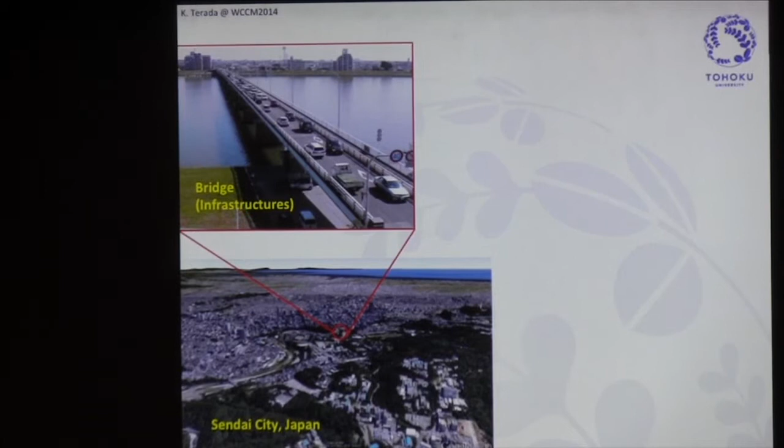Okay, let's start with this slide here. This is my hometown Sendai. Sendai is often subject to earthquakes here. Then this is the bridge, the typical infrastructure here. On this bridge, there are many cars, and these cars are composed of several metals.

By applying the multi-scale computation, We can replace some of these metals with magnesium as a structure member. Then look at this coastal area - we also can apply multi-scale computation to assess the stability of this kind of rock mass. On this rock mass, we may have this kind of nuclear reactor building.

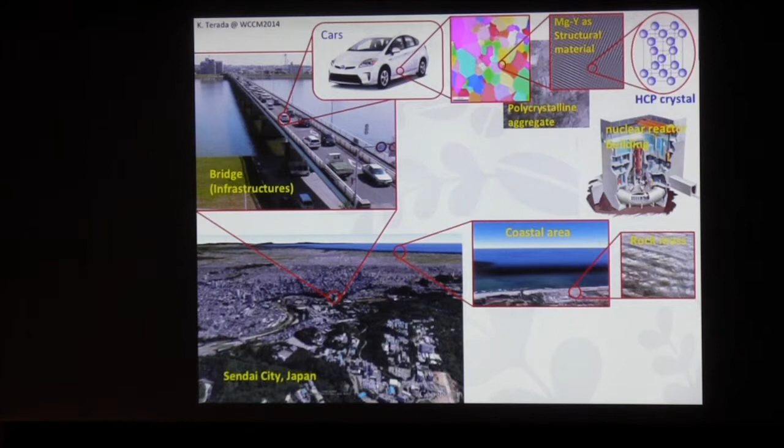In this building, we also have material that suffers from fracture due to aging and chemical reaction. This kind of phenomena, we can also apply multi-scale computation to evaluate the macroscopic behavior. At the same time, we have tsunamis on the coast - the damage by tsunami can also be predicted by multi-scale computation.

So with this overview, we have three topics today in this presentation. One is the method of two-scale analysis for nonlinear solids and plates, with emphasis on the decoupled two-scale analysis for nonlinear solids. The other two topics are applications of the idea of numerical material testing for material science and also disaster science. In this context, we extensively utilize the nonlinear homogenization method.

So I'd like to give you a brief historical development of the nonlinear homogenization method in this context. Let us begin with this first topic.

As you know, the theory of the homogenization method was originally developed in the 1970s and early 80s, mainly in France, Italy, the former Soviet Union, and the United States. These are the famous mathematicians in this field. As you may know, Babuska was the godparent of the homogenization method.

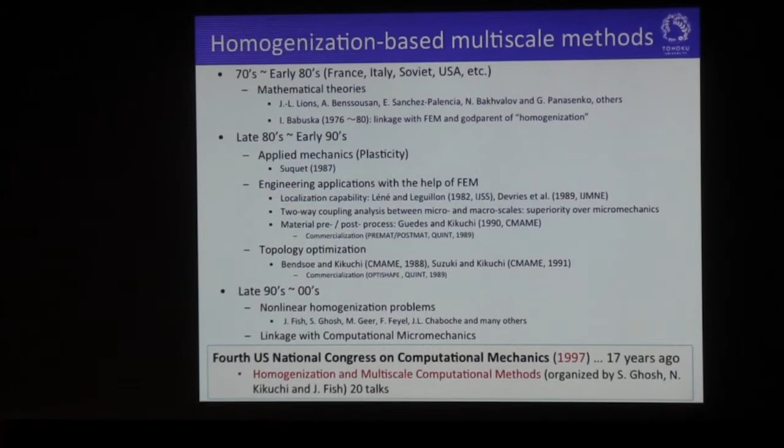According to my survey, it is in this meeting that the term multi-scale was first used in the field of computational mechanics. After that, the popularity of multi-scale became clear. It may be wrong, but according to my survey.

Then, for nonlinear homogenization problems, there are several branches. The work done by Suquet was highly important in this field, especially for inelastic problems. This work was followed by many researchers.

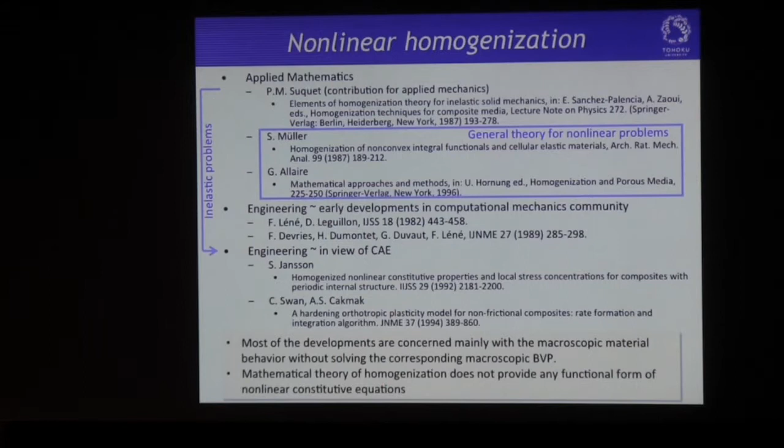However, most of the development is concerned mainly with the macroscopic material behavior without solving the corresponding macroscopic boundary value problem. This is probably due to the fact that the mathematical theory of the homogenization method does not provide any functional form of nonlinear constitutive equations. So many researchers have tried to develop micro-macro coupled FE analysis.

This is also known as FE square, nested FEM, and multi-level finite element method. Here is a list of early developments in this context. This slide shows a typical example of the coupled method.

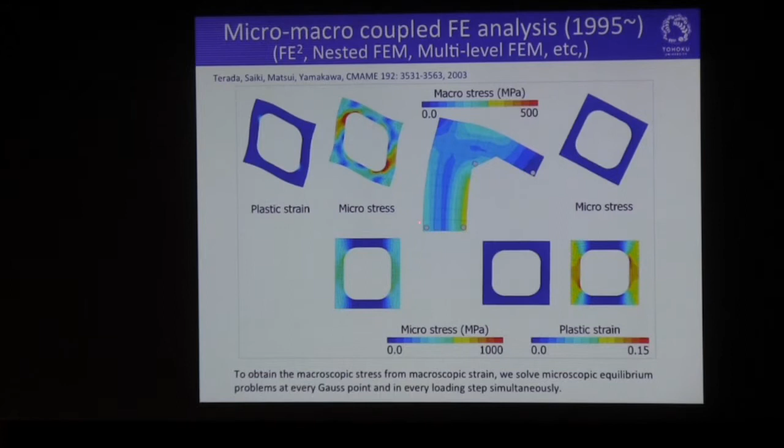Here is my macrostructure. We solve this macrostructure equilibrium problem without any macroscopic constitutive equation. Instead, in order to obtain the macroscopic stress in this field from the macroscopic strain, we solve the microscopic equilibrium problems at every Gauss point and in every loading step simultaneously.

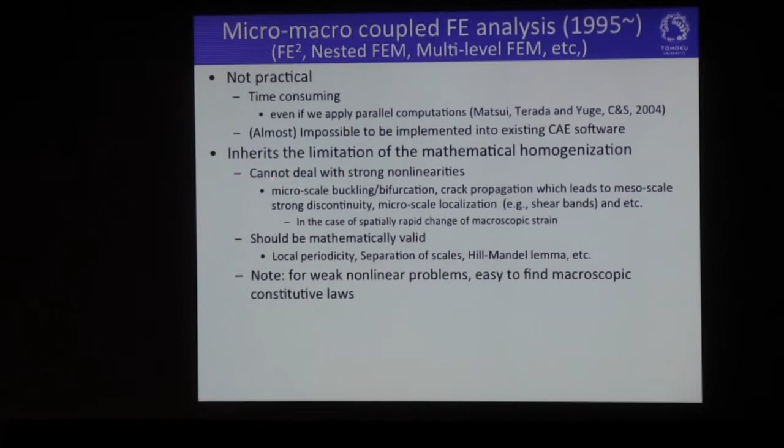As you can imagine, and as some of you already experienced, this method is very time-consuming even with parallel computations. It's also almost impossible to implement into existing CAE software. More importantly, this method inherits the limitations of the mathematical homogenization method, meaning we cannot deal with strong nonlinearity, including microscale buckling and similar phenomena.

We note that for weakly nonlinear problems, it's very easy to find macroscopic constitutive laws. So my assertion is that homogenization-based two-scale analysis methods are readily applicable when the macroscopic constitutive equation can be found or constructed with reference to the constitutive laws assumed at the microscale.

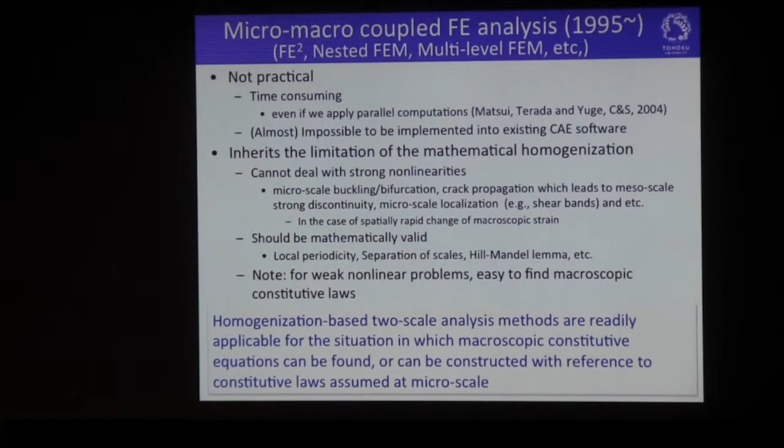This is why I gave up this coupled method 10 years ago, although I was the one who originated the coupled method. But now I recommend the decoupled two-scale analysis method that is studied and validated in these references.

Let me show you a very simple numerical example using this kind of unit cell, which is composed of carbon fiber and polycarbonate matrix.

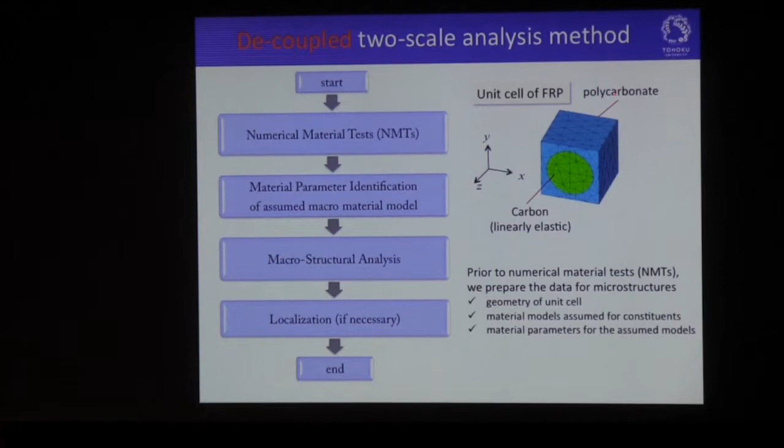Before conducting the numerical material test based on the homogenization method, we prepare the data for the microstructure: the geometry of the unit cell, the material model assumed for the constituents, and the material parameters for the assumed model. We assume the carbon fiber is linearly elastic, but the polycarbonate should exhibit some sort of nonlinearity.

This slide shows the stress-strain curve of the polycarbonate matrix, which shows weak nonlinearity. As you can see, rate-dependent plastic deformation can be found. At the same time, we can see stiffness reduction in the unloading process.

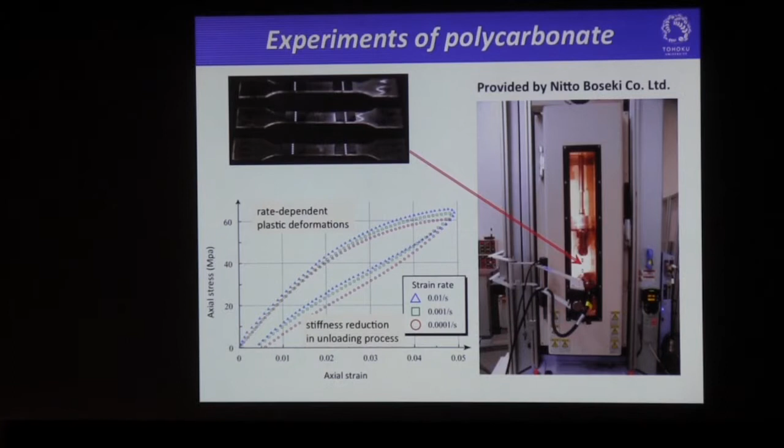In order to represent this kind of material behavior, we introduce this constitutive equation, an elastoplastic creep damage model that exhibits weak nonlinearity. This equation is very standard, so we don't need to explain the details, but here are the unknown parameters for the material.

So we have to identify those material parameters before conducting numerical material tests. After identifying the material parameters of polycarbonate with reference to the experimental data, we can conduct numerical material tests on this unit cell.

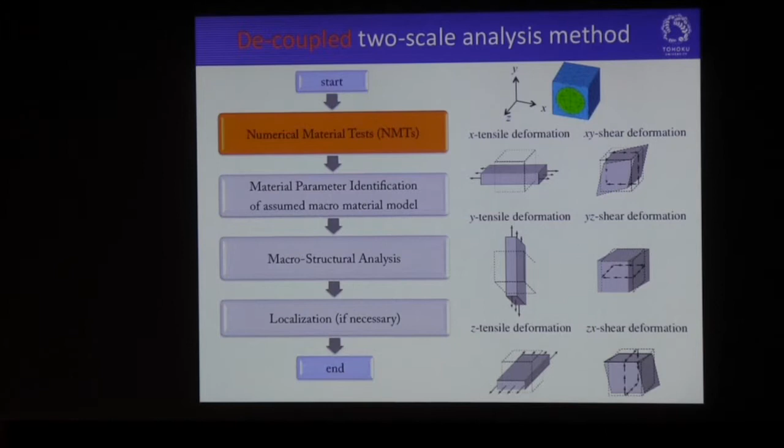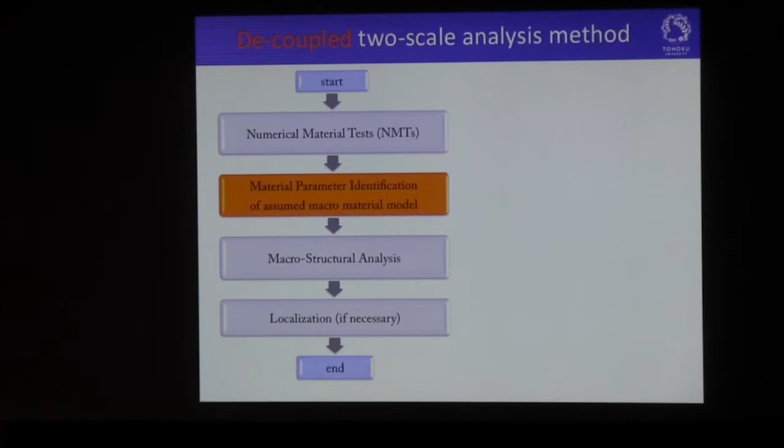Let us move on to the next step. We have to identify, or assume, the macroscopic constitutive equation to represent such macroscopic response. For that purpose, I put forward the ansatz that the macroscopic constitutive law inherits the characteristics of the microscopic one. This is validated in this article.

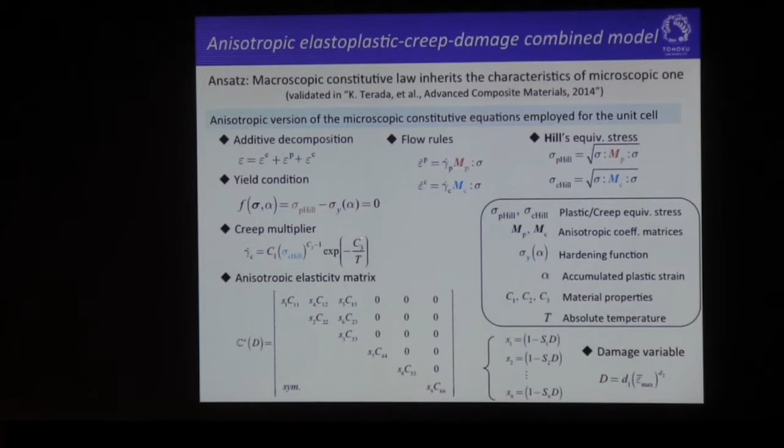Then I employ the anisotropic version of the microscopic constitutive equations used for the unit cell, that is, the anisotropic elastoplastic creep damage model. These equations are almost the same as those assumed at the microscale, except for the anisotropy, which can be represented by the Hill's parameters in creep and plastic strain.

By using different Hill parameters for the plastic and creep flow rules, we can characterize the anisotropic inelastic deformation in this material. These are the material parameters to be identified in this model, which has 39 parameters.

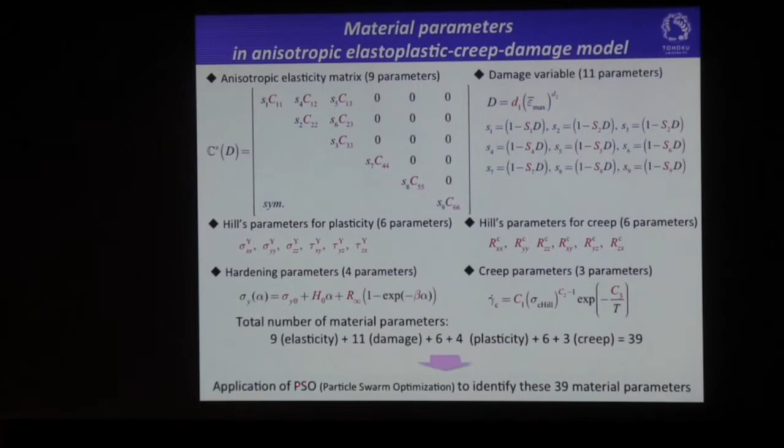So we have to apply some sort of optimization method to identify these parameters. In this study, I applied particle swarm optimization, which is one of the population-based descent methods. We applied this method to identify these 39 parameters.

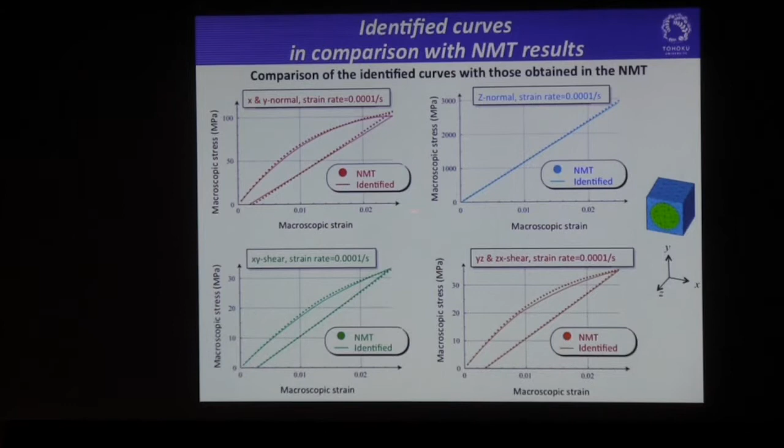We could obtain these identified curves in comparison with the numerical material results. As you can see, the identification is quite successful.

So we can move on to the macroscale analysis. By using the assumed macroscopic constitutive equation and the identified material parameters, we can conduct the macroscopic stress analysis.

Here is my macroscopic structure, which is a typical specimen of fiber reinforced composite. To demonstrate anisotropy, the fibers are oriented in this direction. These are the analysis conditions, but the details are not important in this context of the demonstration.

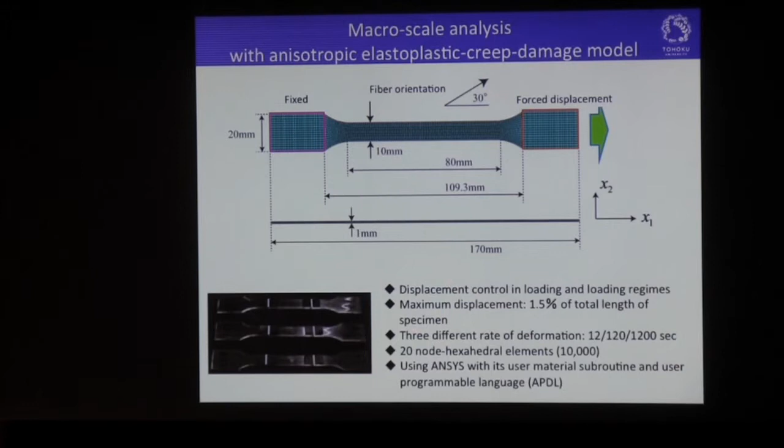Here shows the macroscopic analysis result, the overall response. Through this loading and unloading process, we obtain this kind of macroscopic deformation together with the stress distribution, which shows anisotropy reflecting the fiber orientation here.

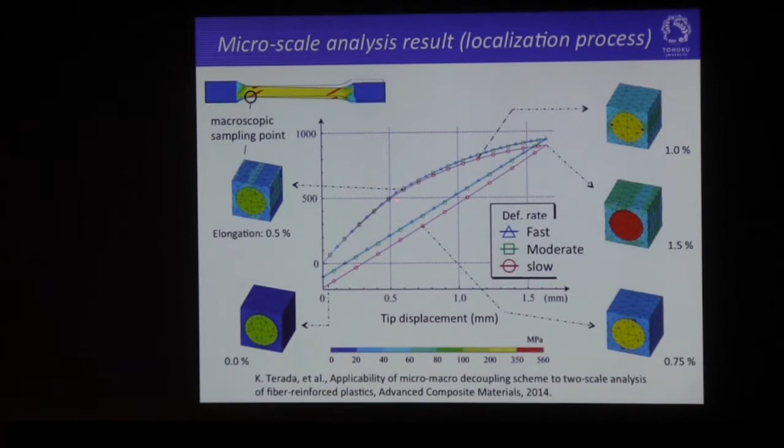So we can move on to the next step, that is localization analysis. We pick up the macroscopic sampling point, extract the macroscopic strain history, then impose that strain history onto the microstructure to get the microscopic mechanical behavior of the unit cell during this macroscopic deformation. We expect this decoupled analysis to have the same accuracy as the coupled analysis, but it is much cheaper compared with the coupled analysis.

Let us move on to the next topic. Because of the feature of the decoupled method, implementation of this method into existing finite element software is very easy. Let me show you the commercialization here.

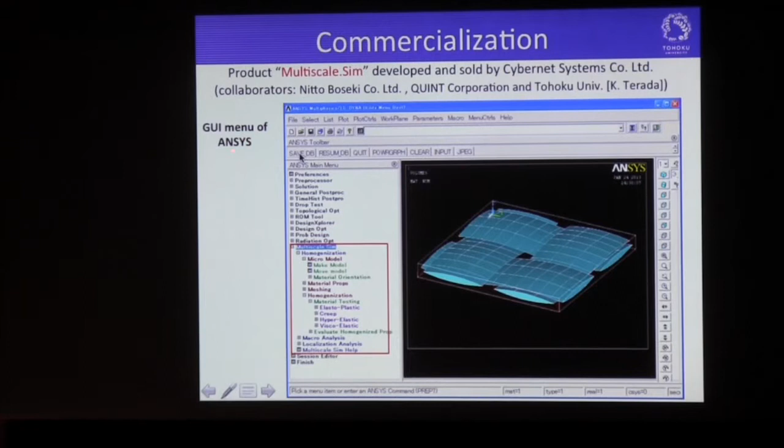This shows the GUI menu of ANSYS, which enables us to perform the multiscale analysis using this GUI. This product is called Multiscale.Sim, developed and sold by Cybernet Systems. These are the collaborators of this development.

Here shows some functions installed in this software. You can see the homogenization part, which involves numerical material testing for weak nonlinear materials. This function also has macro scale analysis, and we can conduct localization analysis within this software.

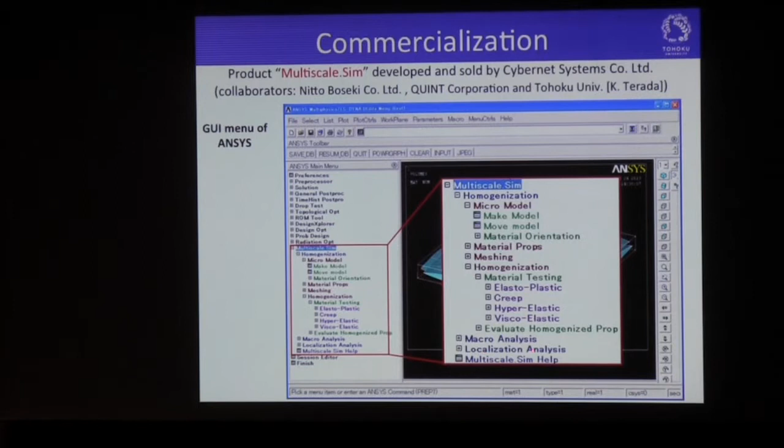Since the micro and macroscopic analysis are standard finite element analysis, we can utilize all the material models inside this software, as well as the existing pre- and post-processing functions. This makes it very easy to analyze.

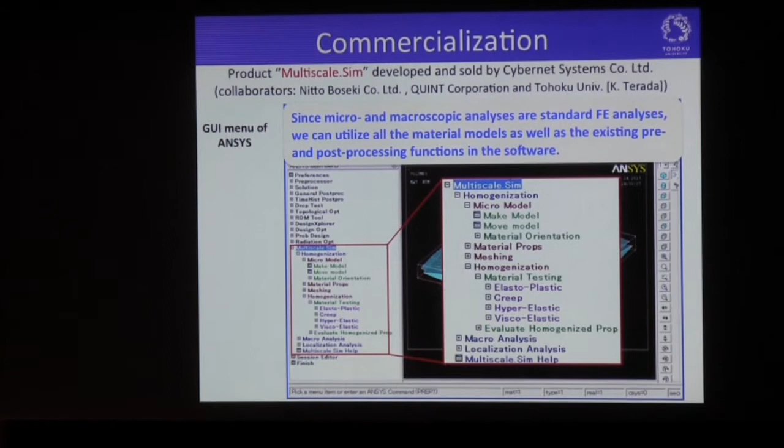Let me show you a simple numerical example using this software: decoupled two-scale analysis of a three-point bending test. As you can see, this is the localization analysis result during this macroscopic deformation.

As you can see, the fibers are damaged in the tensile region of this macrostructure, and the matrix is damaged in the compressive region of the macrostructure.

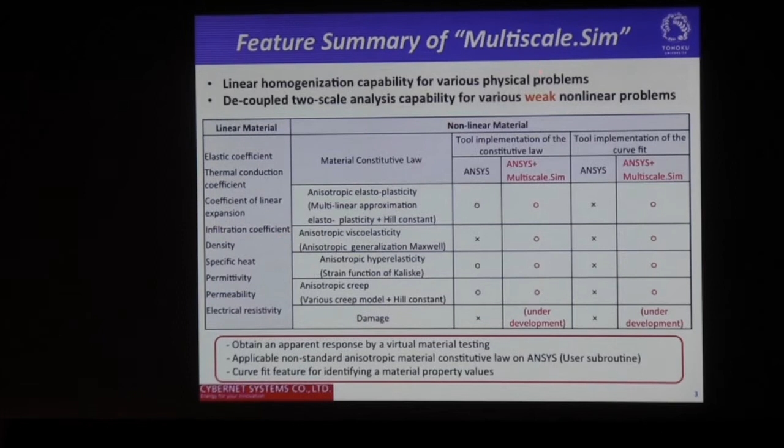This table summarizes the features of Multiscale Sim. This product provides linear homogenization capability for various physical problems, as you can see here. Also, look at this table - this product provides decoupled two-scale analysis capability for various weak nonlinear problems.

Let us move on to the next topic: decoupled two-scale analysis for nonlinear plates. Because time is limited, I just put the result. This is the example of a composite plate with in-plane periodicity.

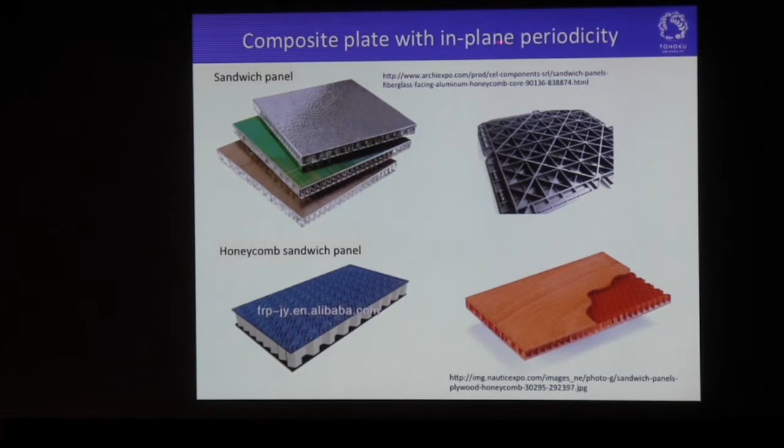Here's my example: a two-scale decoupled plate analysis for a floor slab with asphalt mixture. Here is the macrostructure, this is the microstructure. This microstructure is just a unit cell model with in-plane periodicity, modeled by 3D solid elements. On the other hand, this macroscopic plate model is generated by laminated plate elements.

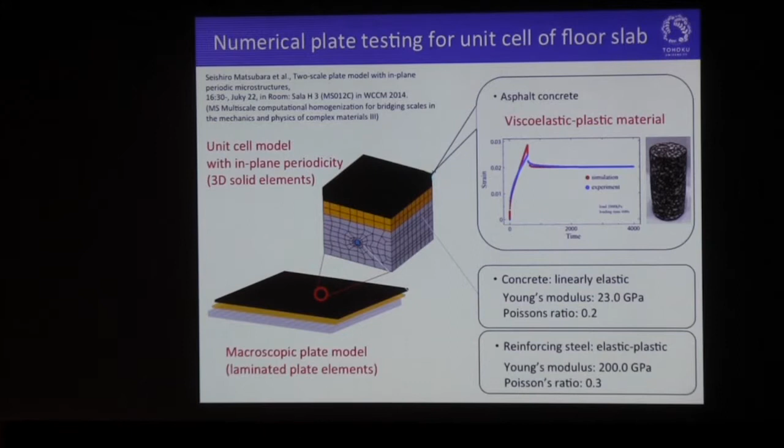Here we assume this kind of material behavior for the asphalt concrete - we assume the viscoelastic plastic type, and the concrete is linearly elastic. Then we apply the method of numerical plate testing in order to obtain the macroscopic plate stiffness.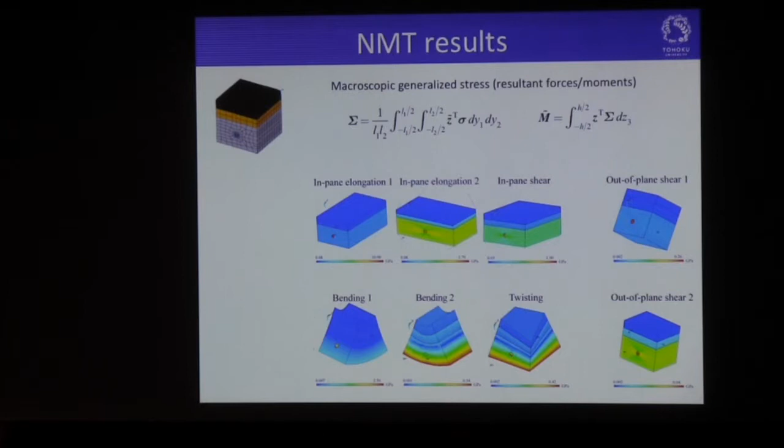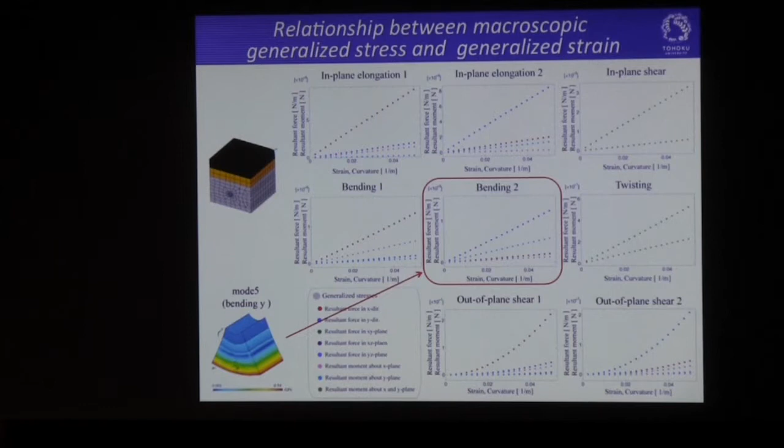Then we could have this kind of relationship between the macroscopic generalized stress and generalized strain. We identified some material parameters for each layer.

Then we could make the macroscopic analysis set up as in this figure. This is the bridge, the floor slab of the bridge, modeled by a plate laminated shell element here. Then we can have this kind of micro and macro response of the floor slab.

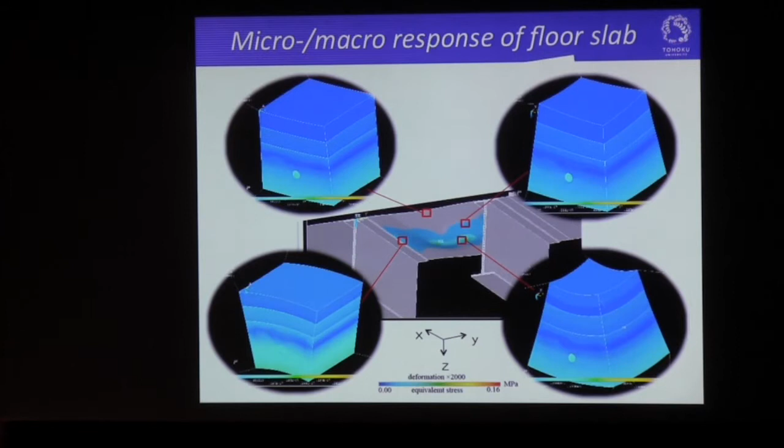This is the example of decoupled analysis of a composite plate.

So let us move on to the next topic, that is numerical material testing in material science. We have two topics today. One of them is the characterization of the macroscopic ductility and toughness of magnesium yttrium alloy. This is joint research to utilize magnesium alloy as a structural material in lightweight cars.

Here is a typical stress strain curve for pure magnesium, and also the curve for the magnesium alloy. Pure magnesium shows poor ductility and toughness because this material suffers from cracks in the microstructure like this. On the other hand, this magnesium alloy shows good ductility and toughness. It is clear the effect of yttrium is the enhancement of ductility and toughness.

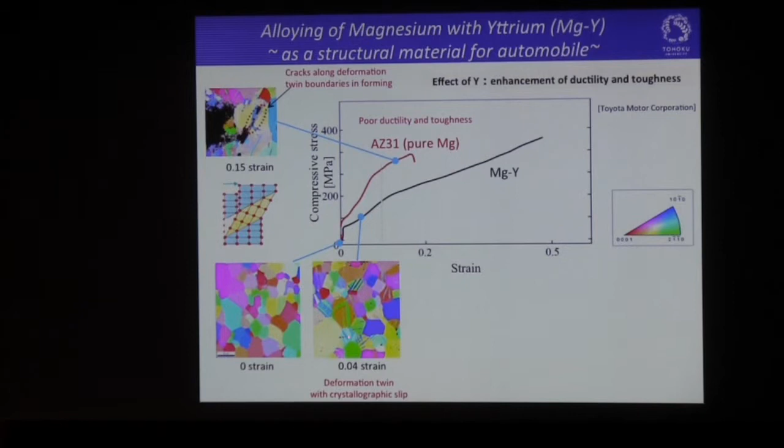Then look at this microstructure - this is the polycrystalline aggregate of the magnesium alloy. Then we apply compressive loading to this microstructure. We have this kind of deformation twinning here with crystallographic slip.

After the final stage of deformation, we could have dynamic recrystallization, which involves grain refinement. These two deformation mechanisms, deformation twinning and dynamic recrystallization, probably make the material more ductile and tough.

I'd like to simulate this complex microscale deformation in order to characterize the corresponding macroscopic material behavior. So in order to do that, I will introduce the deformation gradient.

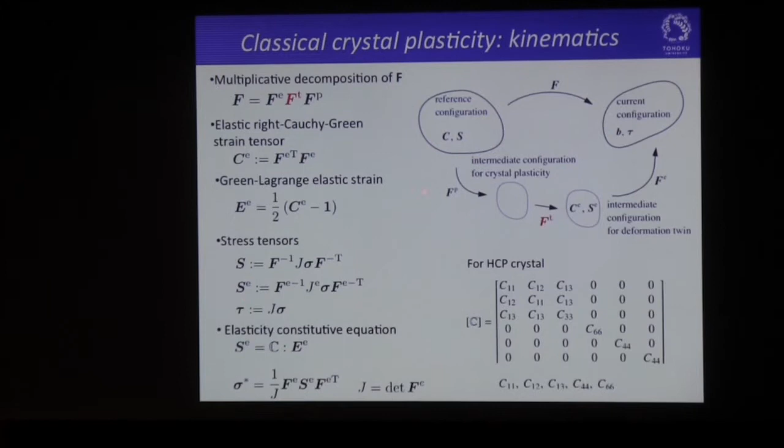This is the twinning deformation gradient between the elastic and plastic components of the deformation gradient. All the other equations are the same as the classical theory of crystal plasticity, so I will skip most of the equations associated with the crystallographic slip.

But here is the standard expression of the resolved shear stress, and here is the Schmid tensor. This is the famous typical expression for the flow rule using the Schmid factor, and also the hardening law and the slip rate here.

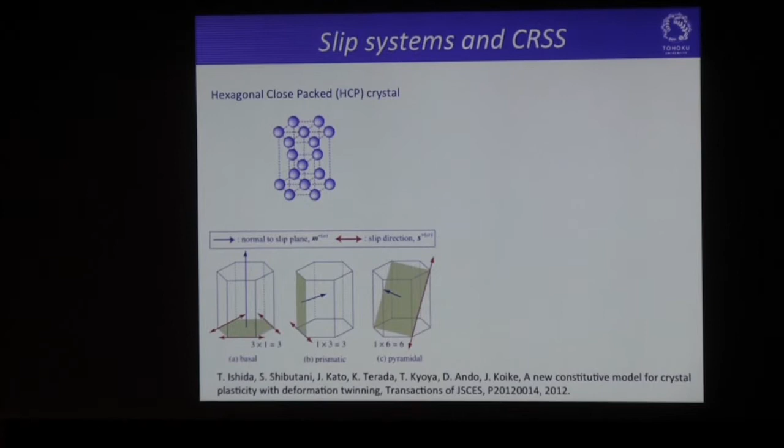But we have to be careful about the characteristics of the slip system and critical resolved shear stress of this material - these are the slip surfaces of the hexagonal close-packed crystal of magnesium. The very important feature of this material is that the critical resolved shear stress of the basal slip is extremely low compared with other slip systems.

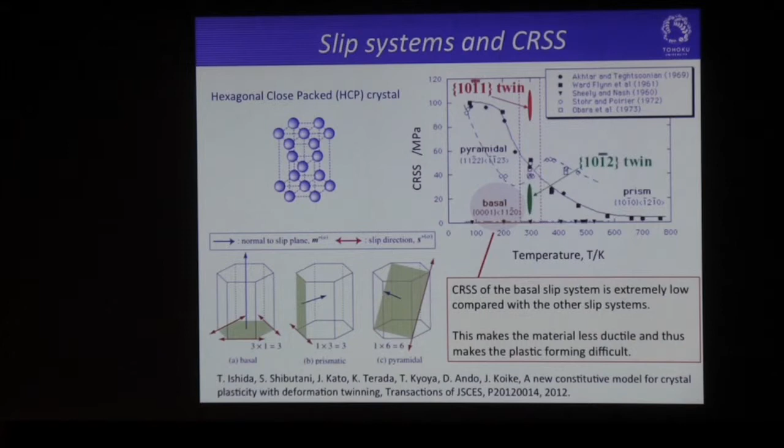This feature makes the material less ductile and thus makes plastic forming very difficult. So in order to be more ductile, magnesium should have other deformation mechanisms. One of them must be deformation twinning, like this.

I have already introduced the twinning deformation gradient. So we assume the twinning deformation gradient of this form. Here is the twin configuration tensor that can be determined geometrically, and some of them are depicted in this figure.

And we take the standard process within the framework of thermodynamics to derive this kind of evolution equation, the flow rule of the internal variable. This is the corresponding driving force of deformation twinning.

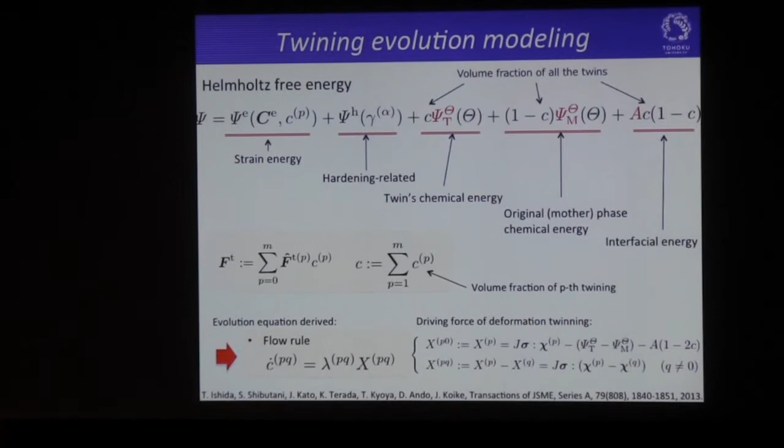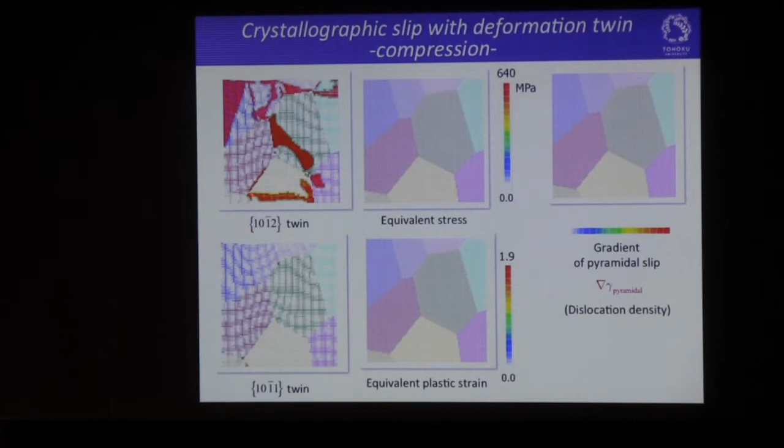Here shows a numerical example under compression. This is the typical distribution of the deformation twinning. As you can see, 10-12 twinning is more likely to be active compared with this deformation twinning.

During this deformation, we could have this kind of microscopic stress distribution together with the plastic deformation. As you can see, in the region of the twinning deformation, we could have this kind of small value of plastic strain.

At the same time, we could also have the distribution of the gradient of pyramidal slip, which we employed as a driving force of the dynamic recrystallization. This is just the dislocation density, and this is the distribution of the gradient of pyramidal slip.

Using this information, we could perform the dynamic recrystallization by using the multi-phase field method, like this.

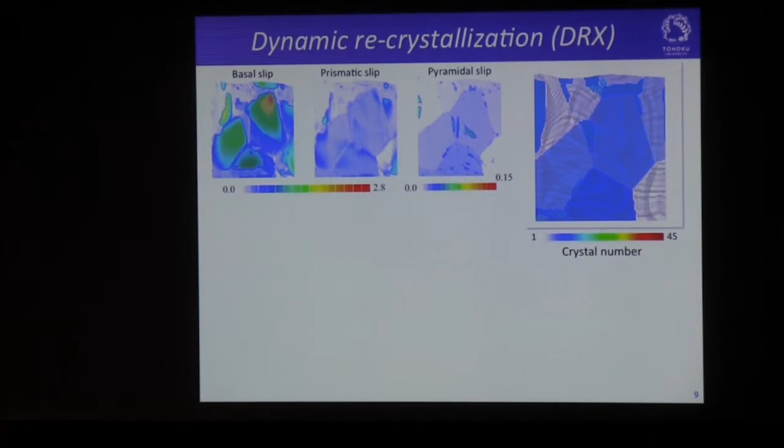We performed a coupling simulation of the crystal plasticity finite element method and the multi-phase field method in order to evaluate the nucleation and grain growth, like this. At the same time, we could have this type of macroscopic stress-strain curve.

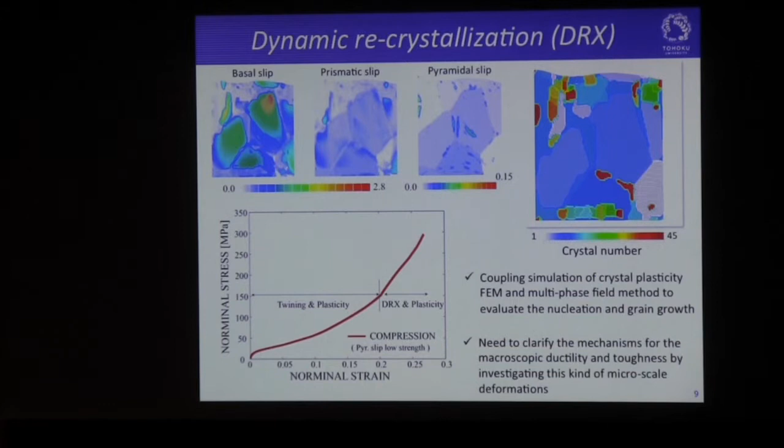So now on, we have to clarify the mechanism for the macroscopic ductility and toughness by investigating this kind of microscale deformation and the macroscopic response. But unfortunately, we haven't done that yet - this is ongoing research, so I don't have any result further. Let us move on to the next topic.

The next topic will be the assessment of the macroscopic strength and durability of polycrystalline metals, which involves microscale cohesive cracking due to hydrogen embrittlement.

Hydrogen is a very important element in energy engineering. When hydrogen diffuses along the grain boundary in a polycrystalline aggregate, the material suffers strength degradation, which may be caused by an electrochemical reaction. This strength degradation is called hydrogen embrittlement.

This eventually causes segregation of the grain boundaries, and as a result, the macroscale strength also decreases with cracking. Unfortunately, the interaction between the micro and macroscopic fracture process has not been fully understood yet. So I'd like to characterize the macroscopic strength and durability by analyzing microscale cracking in a polycrystalline aggregate subjected to hydrogen-induced degradation.

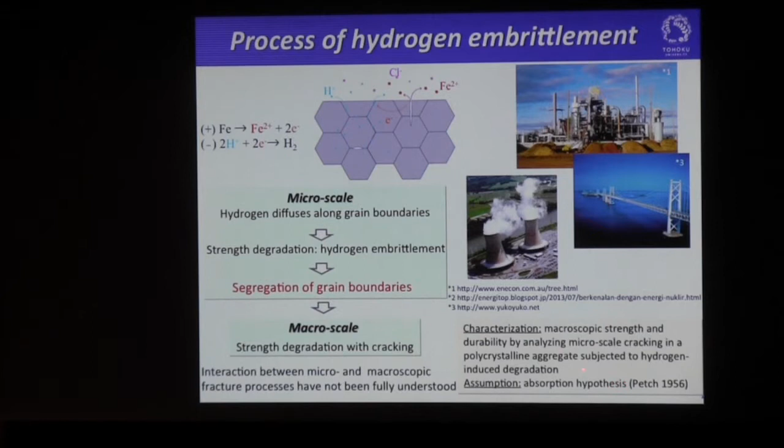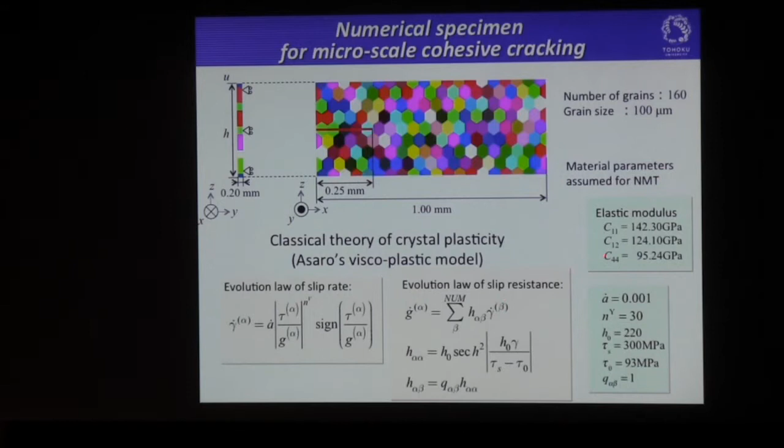In order to represent the plastic deformation of this material, we employ the classical theory of crystal plasticity, with this evolution law of slip rate and slip resistance. These are the material parameters I assumed for the numerical material testing here.

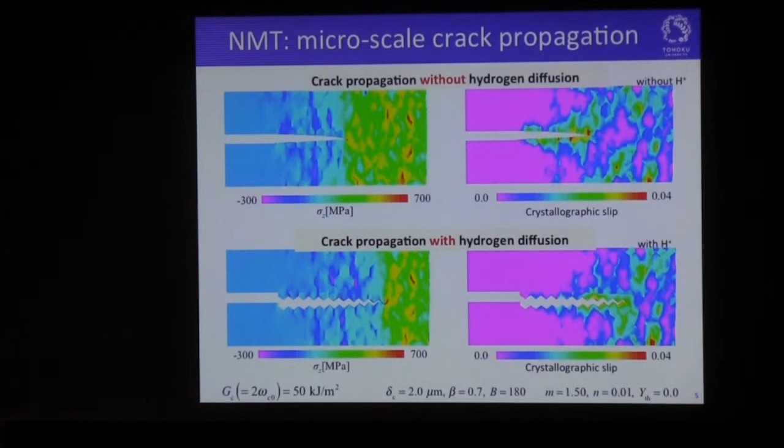So, next topic: we move on to the numerical material test for disaster science. This is the material to disaster — the scale is totally different.

We have three topics today. One of them is the two-scale stability analysis for the seabed, or rock mass, with coastal levee.

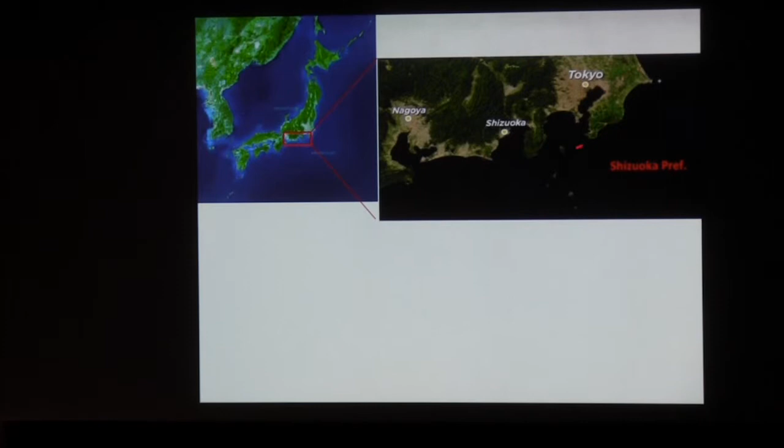Here shows the Japanese islands, and here we have Shizuoka prefecture. We may have this kind of nuclear power plant subject to earthquake and tsunami here. But today I'm not interested in this facility, but in the seabed close to this plant, on which the coastal levee and intake towers are laid.

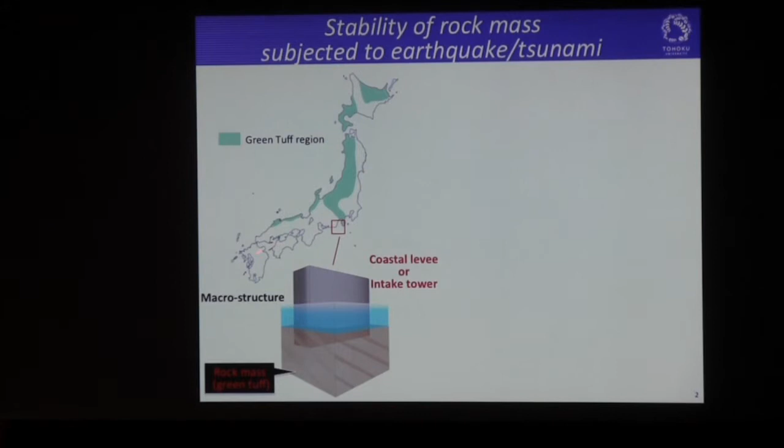Here, the rock mass is composed of green tuff. This shows the green tuff region around these islands. This coast is covered by this kind of alternately layered rock mass, which has this kind of microstructure composed of mudstone and sandstone, although this has a different dimension here.

So the mission is to assess the stability of the seabed, that is the rock mass supporting the coastal levee or intake tower subjected to tsunami. For that purpose, we have to conduct a numerical material test to characterize the macroscopic strength by considering the anisotropy in deformability and strength, and also the dependency on consolidation stress. At the same time, we consider the elastoplastic behavior in compression and the quasi-brittle failure in tension.

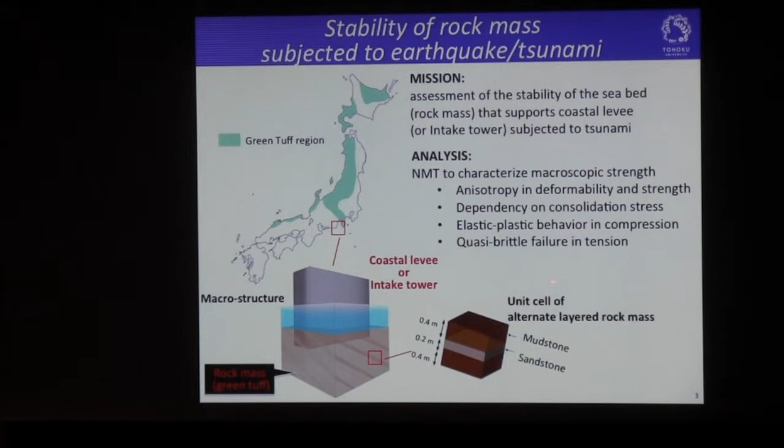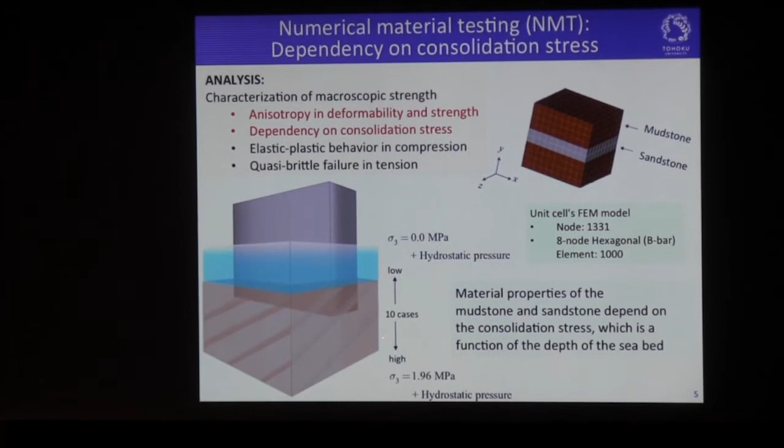Then, as I mentioned, we have to consider the anisotropy in deformability and strength, and also the dependency on consolidation stress, that is, the material property depending on consolidation stress which is a function of the depth of the seabed. This is the intake tower, this is the seabed.

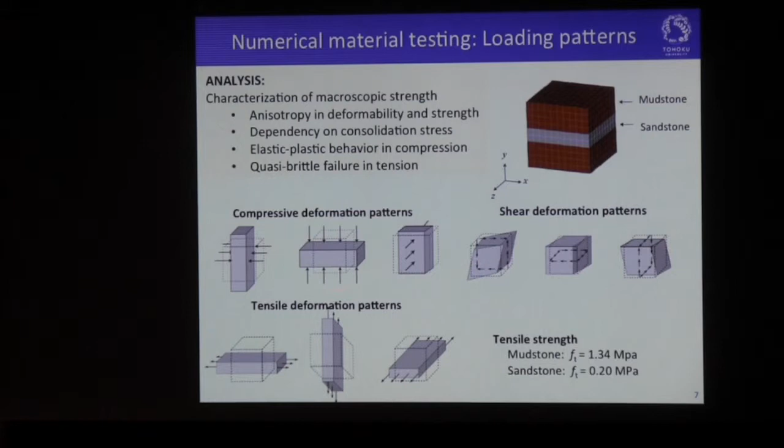With this material information, we can perform numerical material testing for this kind of microstructure composed of mudstone and sandstone, imposing macroscopic deformation into this unit cell to obtain the numerical material test result.

In order to represent such anisotropic response, we employ Hill's model for anisotropic plasticity. This is the standard orthotropic elastic tensor for the generalized Hooke's law, and this is the standard expression for the yield function using Hill's equivalent stress. We don't need to explain the detail, but here we have the material parameters to be identified.

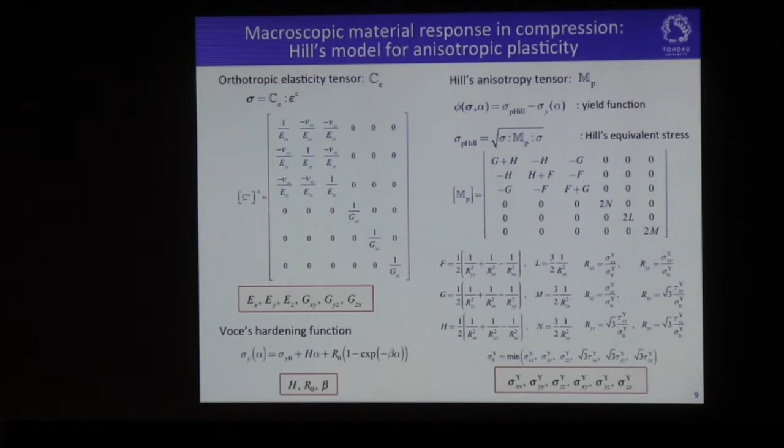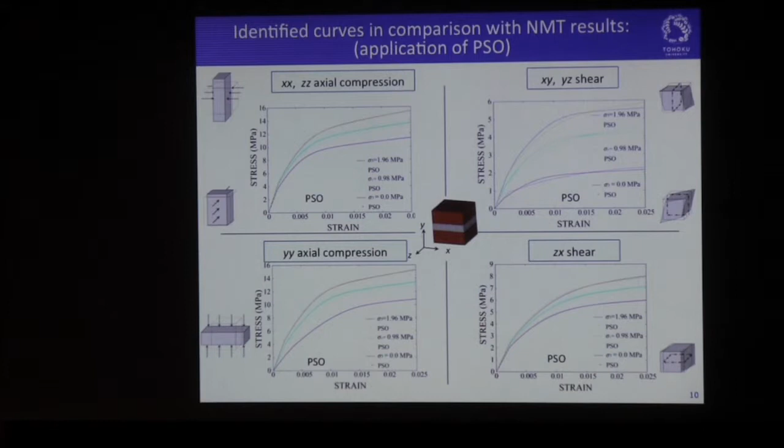Now this is the macroscopic material response in tension as a result of the numerical material testing on the unit cell, which exhibits quasi-brittle failure in tension. Depending on the macroscopic loading patterns, we have an anisotropic characteristic in the macroscopic tensile strength, like this.

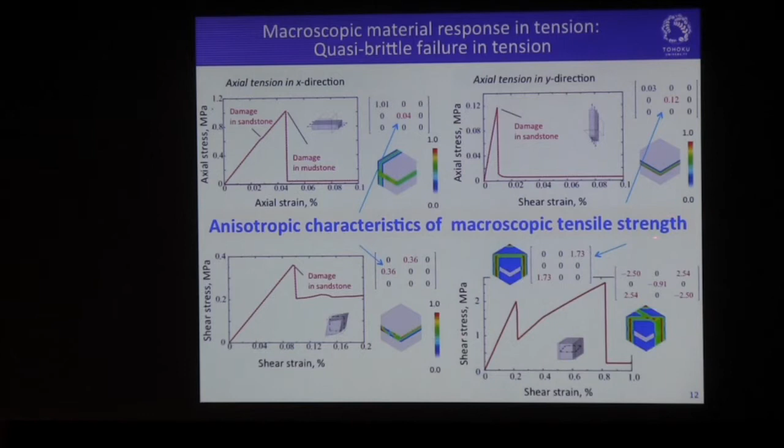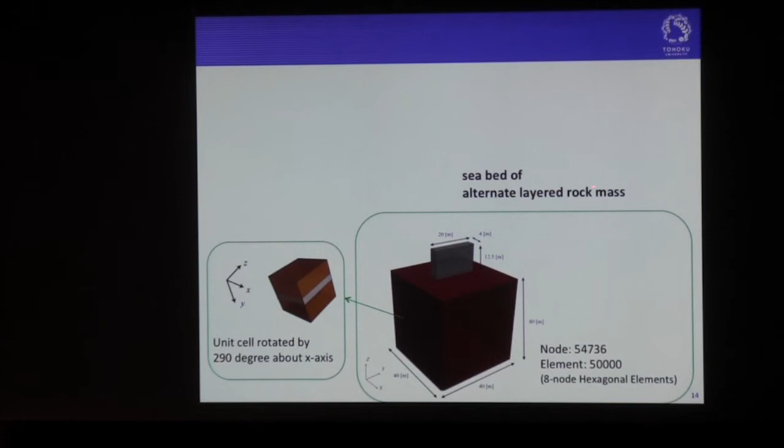Now let's conduct the macroscopic analysis of the seabed of alternate layered rock mass composed of this unit cell. The external loading on this seabed comes from the coastal levee, which is attacked by the fluid force generated by tsunami. For the tsunami simulation, we set up this domain.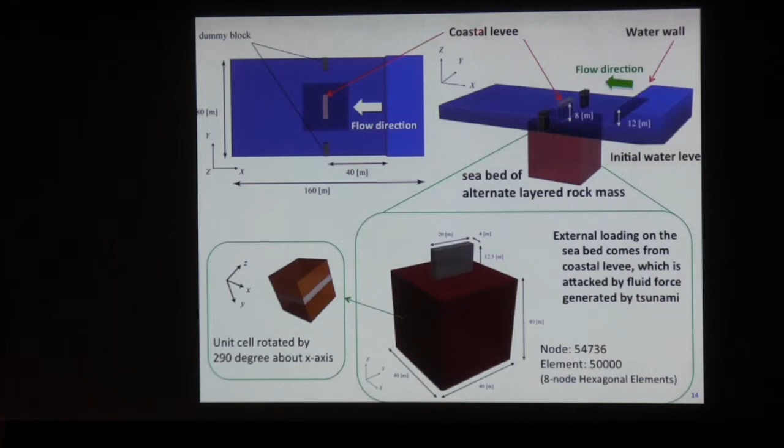Here is the water wall, with the initial water level here. This is the flow direction, and this is the coastal levee. We put here dummy blocks. Then this is the analysis result.

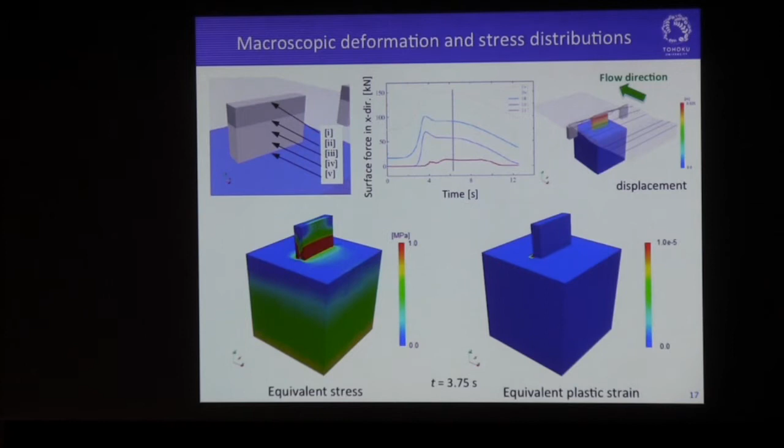Then we can assess the macroscopic stability of the seabed by using the envelope of macroscopic strength. Here is the envelope. We pick up four points of the macroscopic material point. Then we can recognize this point B is a possible failure position in tension.

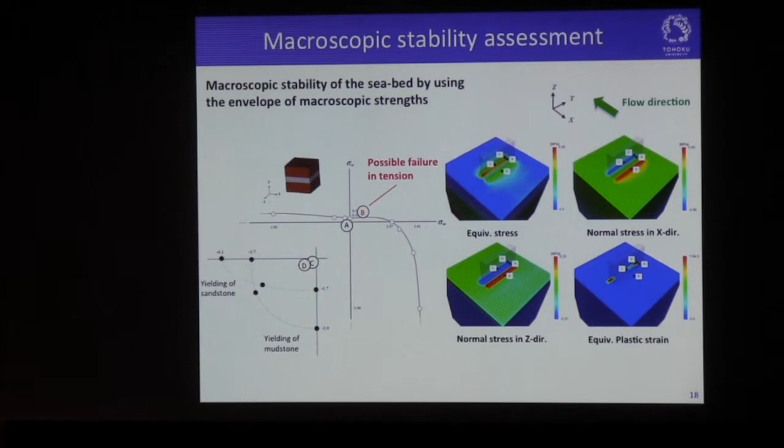At the same time, we can conduct localization analysis based on the homogenization theory, so we can extract the deformation history of these material points to the unit cell to obtain the microscopic mechanical behavior at the points of interest.

So we can assess this kind of strength and stability of the seabed from the macro and the microscopic viewpoint by applying the decoupled two-scale analysis method as well.

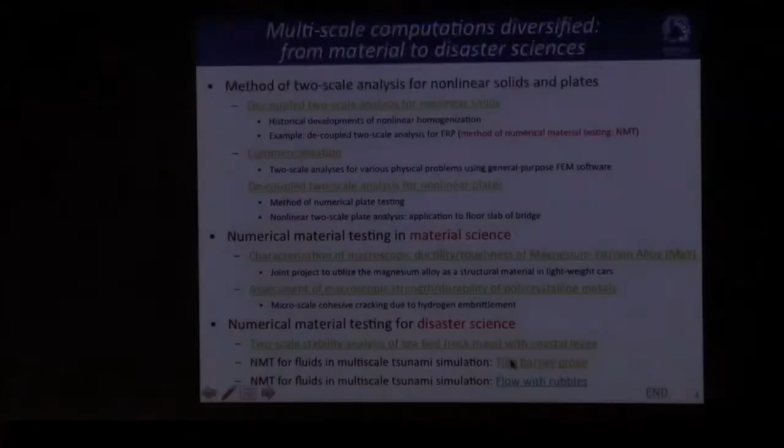The next topic will be the numerical material test for fluids in multi-scale tsunami simulation. I will present the multi-scale modeling for tide barrier groves. Here, the tide barrier grove is attacked by tsunami.

We first separate the spatial scale. This is the scale of overall arrangement of the grove. This grove is composed of several trees like this, and this tree is composed of branches like this in the local region.

Then we define the representative volume element for these branches. We perform the numerical material test on this region to obtain the loss characteristic of the flow for phase two.

We conduct numerical material tests in phase one to have the macroscopic loss characteristics for phase two. Then we applied numerical material tests on phase two to have the macroscopic loss characteristics for phase three. For that purpose, we have to set up the governing equations for phases one, two, and three.

This is a very typical standard Navier-Stokes equation, except for this term. This term is the porous media parameter representing the effect of pressure loss by branches in phase one, trees in phase two, and the grove in phase three. This term can be evaluated by numerical material tests at each scale.

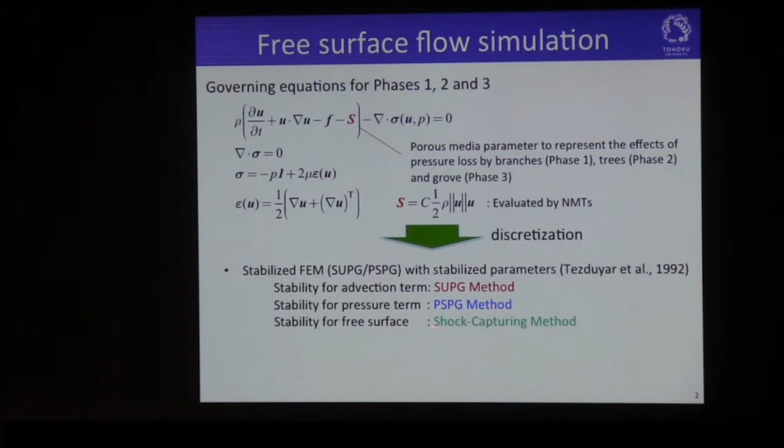In order to solve this equation, we employed a stabilized finite element method with stabilized parameters as given by Tezduyar here. The SUPG method and PSPG method, along with a shock capturing method, are employed. Also, we use the VOF method for free surface representation, like this.

Here is my representative volume element. Here are the test surfaces to measure the pressure loss. Here is the flow direction for phase one. By changing the combination of entry speed and water volume versus total volume in our representative volume element, we conduct numerical material tests on flow with obstacles in order to obtain the loss characteristics of phase two.

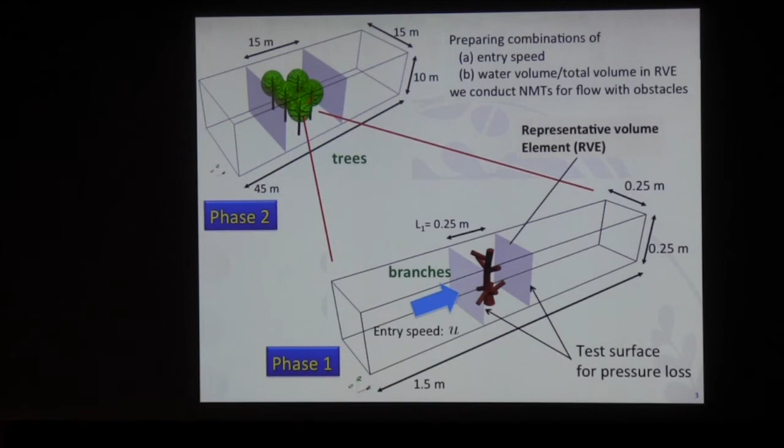By using this information for the phase two loss characteristics, we can conduct a numerical material test on phase two. Here again, we have the representative volume element for phase two. This is the test surface to measure the pressure loss here, and this is the flow direction.

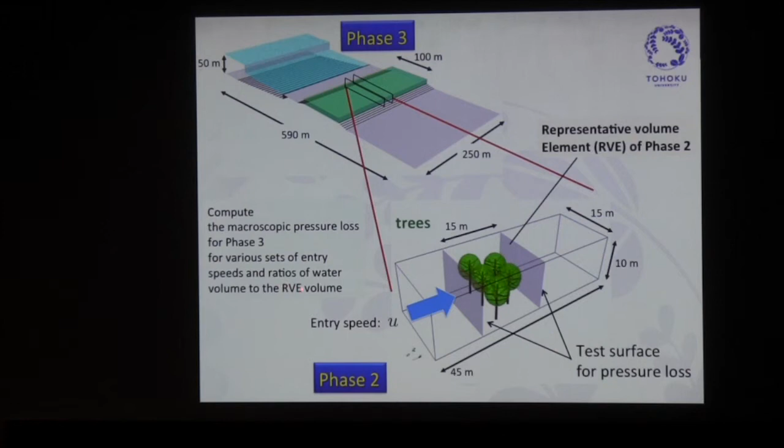Then we can compute the macroscopic pressure loss for phase three here. This is the coastal levee, the grove. Then for various sets of entry speeds and ratios of water volume to RVE volume, this is a typical result of the flow state in phase two, the numerical test result on the RVE, in order to obtain the macroscopic loss characteristics for phase three.

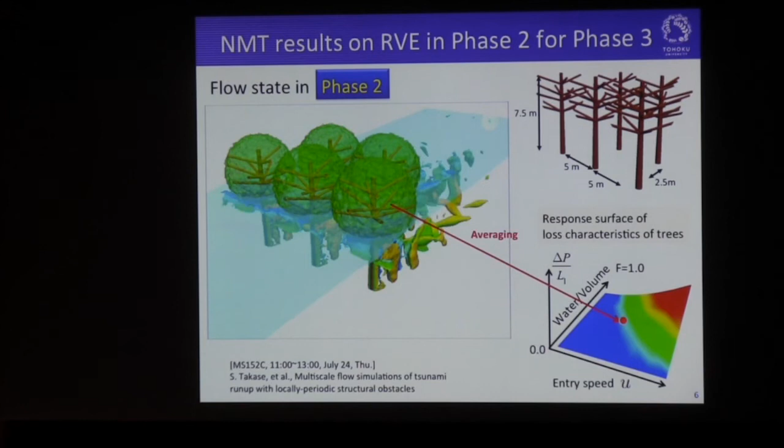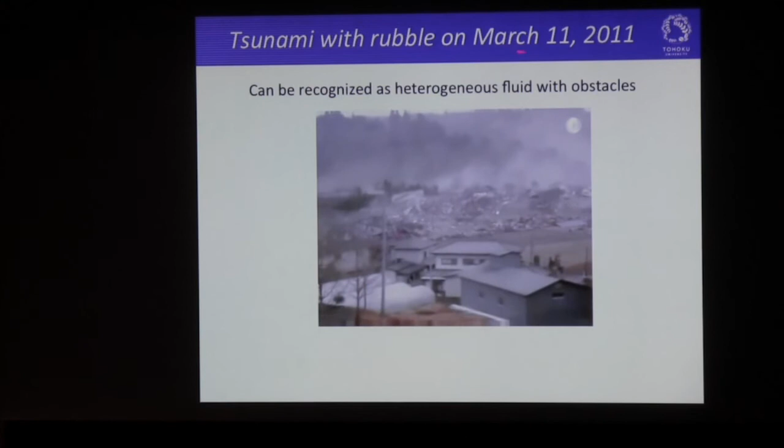Now let us move on to the final example. This is flow with debris. Because time is limited, I will talk quickly. This can be recognized as heterogeneous fluid with obstacles, that is, the tsunami with debris on March 11, 2011. We'd like to have the equivalent homogeneous fluid to estimate the fluid force.

For that purpose, we set up a numerical viscometer to evaluate the dynamic viscosity and density for the overall flow. Here is my numerical viscometer modeling. This includes several rigid bodies: square logs, bars, spheres, and lumber.

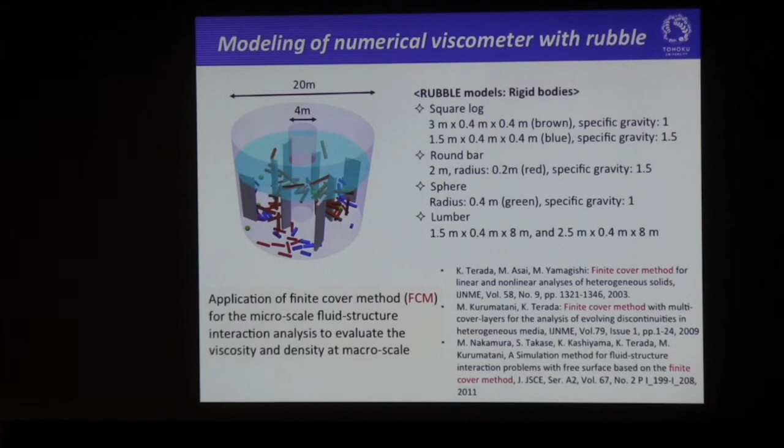Then we applied the finite cover method for the microscale fluid-structure interaction analysis to evaluate the viscosity and density at the macro scale. This finite cover method was originally developed for structure analysis, but we applied this method to fluid-structure interaction. Here shows quickly what the finite cover method is.

Define the geometry of the structure, then generate the meshes for the structure, then superimpose the meshes, which are independently generated. Then define a regression function inside and outside the structure. Then I extract the physical cover located at the interface between those structures. Finally, we can define the location of the interface using the regression function and regenerate the meshes for the fluid.

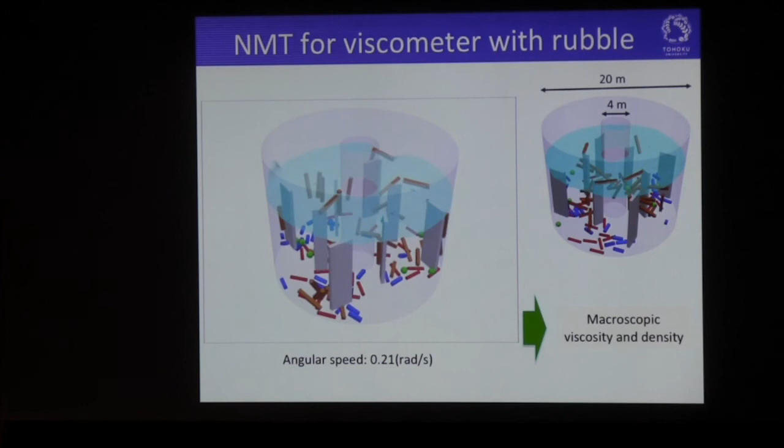Here shows the numerical result of the viscometer with debris. Then we can evaluate the macroscopic viscosity and density using this test result. Then we can perform macroscopic analysis, that is, the tsunami simulation with viscosity and density evaluated by the numerical material test. Here is the homogeneous water, which is equivalent to the heterogeneous water with debris. Here shows the result: the tsunami hits the structure to destroy it. This way reflects the effect of the debris in terms of macroscopic viscosity and density.

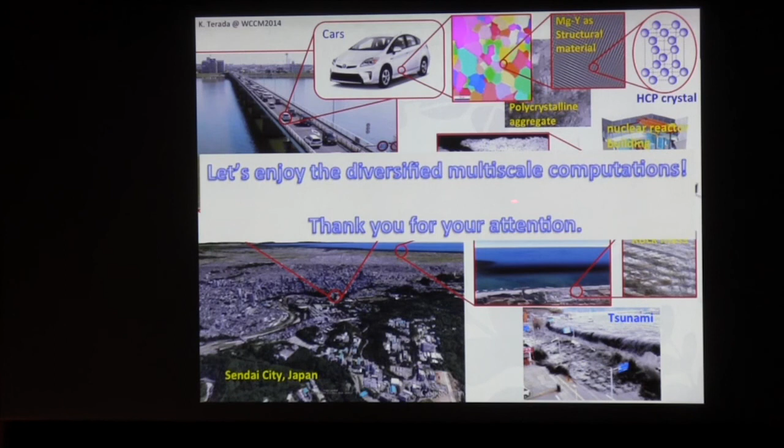Okay, this is all of my presentation. Let me conclude my presentation with this slide. So let's enjoy diversified multi-scale computation. Thank you for your attention.